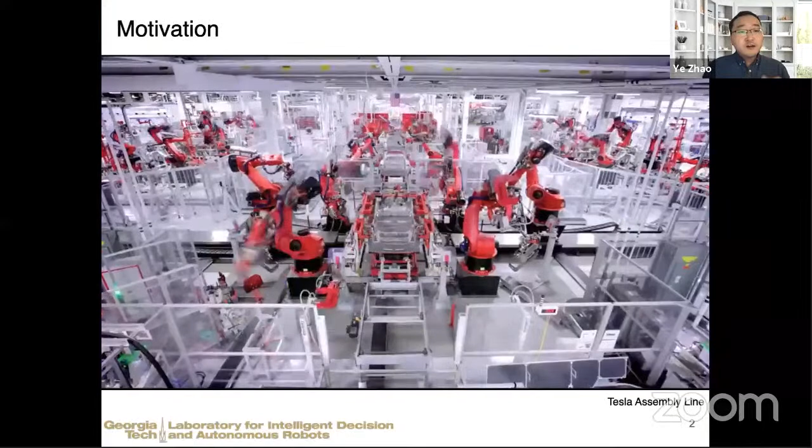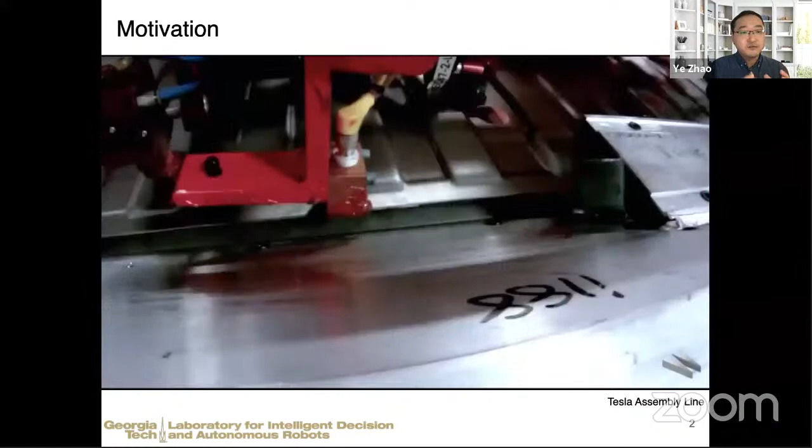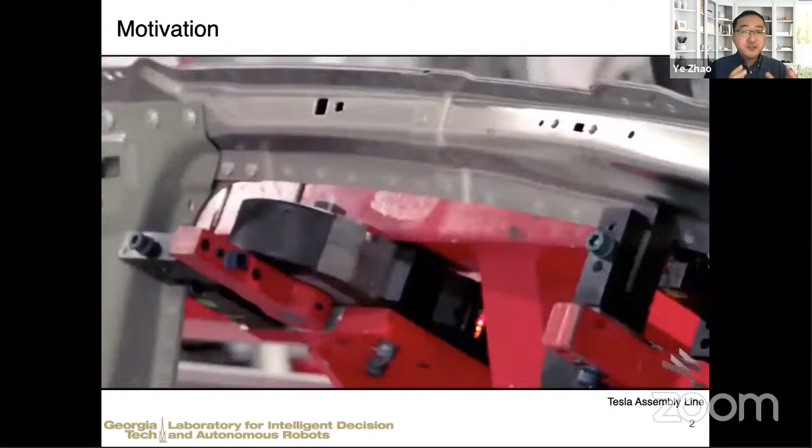Nowadays, many world-renowned automobile companies have adopted highly automated production lines for their vehicle manufacturing process. This is one example from the Tesla assembly line for their Model S vehicle. With current automation technologies, these industrial robots are almost as efficient as they can be nowadays. Almost every single component, either giant ones or tiny pieces, can be assembled within a few seconds. This has greatly relieved human workload by performing tedious tasks that could not be automated previously.

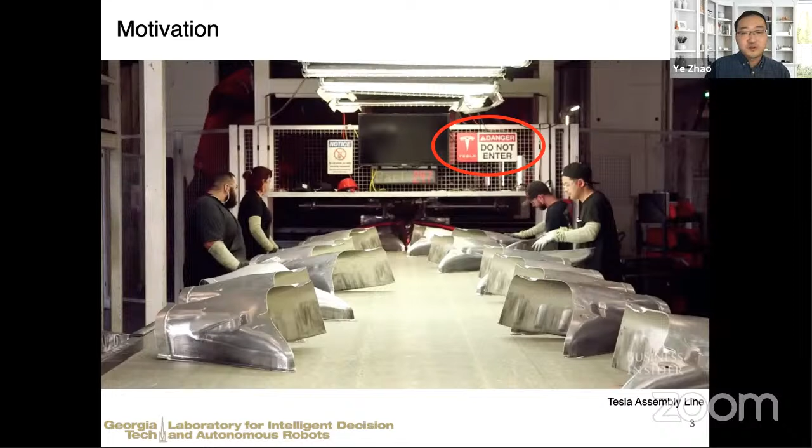Not only industrial robots, but also humanoid robots achieving more types of complex tasks. Many people in this seminar have probably already seen these robots from Boston Dynamics and Agility Robotics. These robots can demonstrate great agile and dynamic behaviors in outdoor and indoor environments. However, there are still many fundamental challenges from theoretical, computational, or experimental levels.

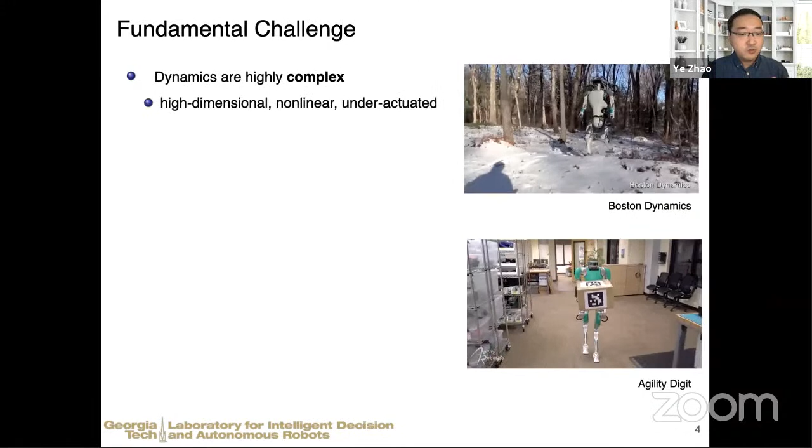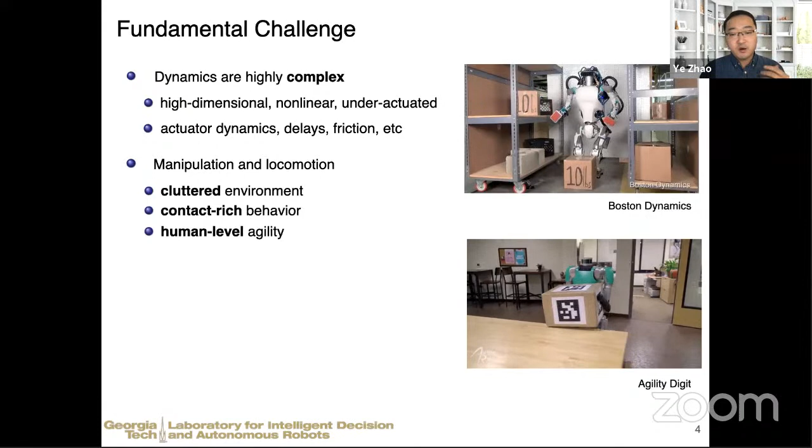First of all, the dynamics are highly complex - commonly high dimensional, nonlinear, and underactuated. Practical issues always exist in real systems, such as actuator dynamics, delays, friction, and so on. Many times the manipulation and locomotion problems are still far away from achieving performance like operating in cluttered environments, targeting contact-rich behaviors and human-level agility.

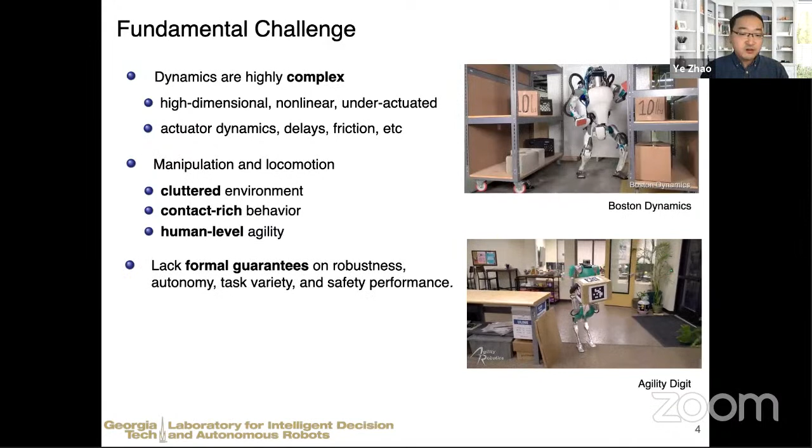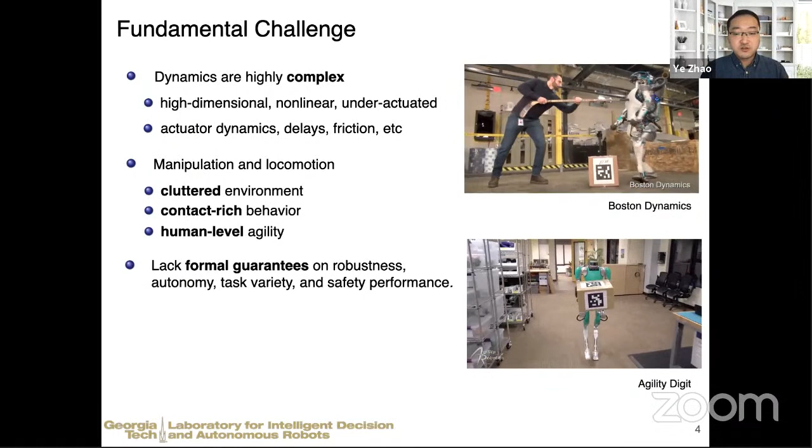Many planning and decision-making algorithms nowadays still lack formal guarantees such as robustness, safety, autonomy, and task variety, especially when the robot operates in outdoor rough terrain or partially observable environments. So it's very important for us to propose new computational tools and methods such that the robot can respond to unforeseen events and adapt to new environments at runtime.

From a high-level perspective, a fundamental question we are interested in is: what planning and decision-making algorithms do robots need to achieve agile, safe, robust, and collaborative behaviors, especially through contact? In this talk, I'm going to talk about some recent task and planning frameworks for highly dynamic locomotion, and in particular, present three unique angles to quantify robustness and reason about uncertainties.

I'm going to start with whole-body dynamic motion planning for robots maneuvering in constrained environments, and propose a certain robust metric to enable resilient contact locomotion decisions. Following on this direction, I will also talk about a task planning framework with belief tracking, especially for safe locomotion in partially observable environments.

And at the very end, I will discuss some contact-aware trajectory optimization method that can parameterize terrain uncertainties for robust cost function design and enhance risk-sensitive locomotion performance.

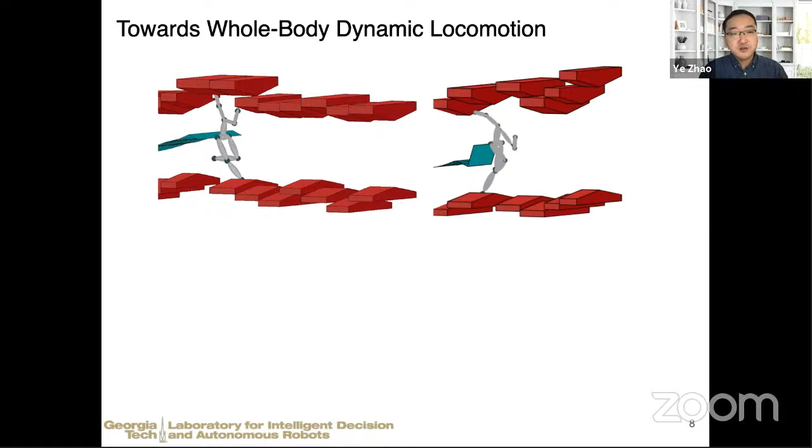So deviating from traditional bipedal-like locomotion, in this study we are targeting more generalized multi-contact behaviors using all-limb contact. The robot is expected to react to diverse environmental events by making sequential contact decisions. We expect the task planner can satisfy all the required task specifications in this so-called provably correct manner.

I also want to point out the locomotion scenarios in these constraint environments do have real-world applications. For example, the Thailand cave rescue a few years ago and the more recent DARPA subterranean challenge, although the current solutions mainly focus on grounded or aerial mobile robots.

To achieve these goals, a key question we should ask is how to intelligently compose and decompose these complex motions. This motivates us to investigate template-based locomotion methods, and in this case we refer to real human motions, especially those observed in parkour or gymnastic scenarios. So we extract the essential dynamics and model the abstract behaviors.

In particular, in the field of dynamic locomotion, many people use simplified models for planning and control, for example the inverted pendulum model, hopping model, multi-contact model, and so on. So here our goal is to unify these template models using a sequential composition approach for planning. It is essential to understand how to intelligently switch among different locomotion modes in response to diverse environmental events.

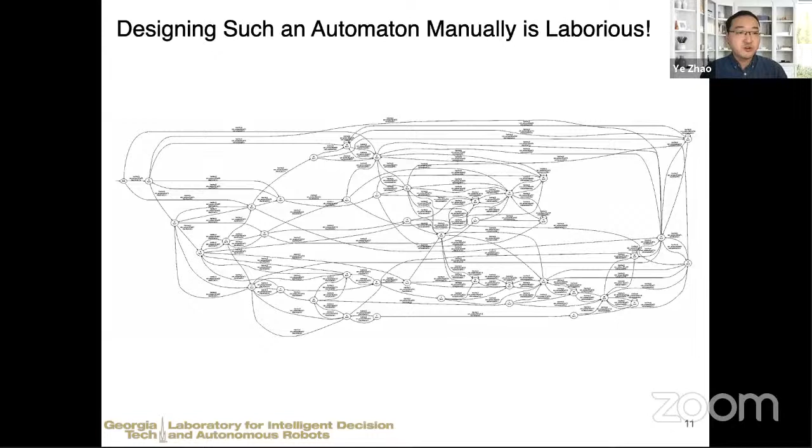So the way we frame this problem is to use temporal-logic-based formal methods for the task specifications and the planner synthesis. Temporal-logic methods have been widely used in hardware and software verification. In robotics, it's mainly used for mobile robot motion planning, but it's still relatively underexplored in the dynamic legged locomotion community, and our lab has been pushing for this direction over the past 2 years.

In particular, we follow a fragment of linear temporal logic formula named generalized reactivity one formula, which has the benefit of polynomial complexity.

By specifying the initial, transitional, and goal propositions, we can formulate the desired proposition phi in this so-called assume and guarantee form. Phi q encodes the properties of the locomotion keyframe state, phi e is the environment's assumption encoding knowledge about allowable environmental behaviors, and phi s describes the correct behaviors of the overall system. So this formula tells us if phi q and phi e are satisfied, then the system is guaranteed to behave in a correct manner.

Our objective is to synthesize a contact planner switching protocol such that, given a finite transition system TS and LTL specifications, we can synthesize a switching strategy gamma that only generates correct executions, so the robot can successfully maneuver in this constrained environment.

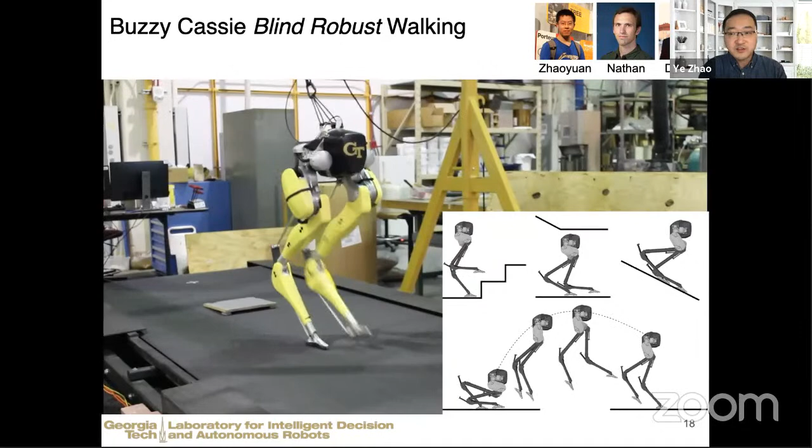The walking controller can successfully handle some terrain perturbations from wood blocks, but it purely relies on the robustness of this default low-level controller. Recently we've been actively moving toward temporal-logic-based sequential composition so the robot can respond to diverse environmental events, as shown before, like going upstairs, ramped terrain, or even when the terrain gets crashed.

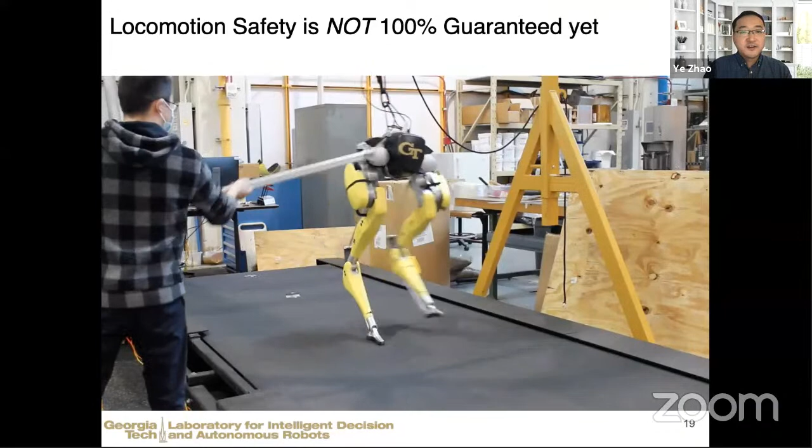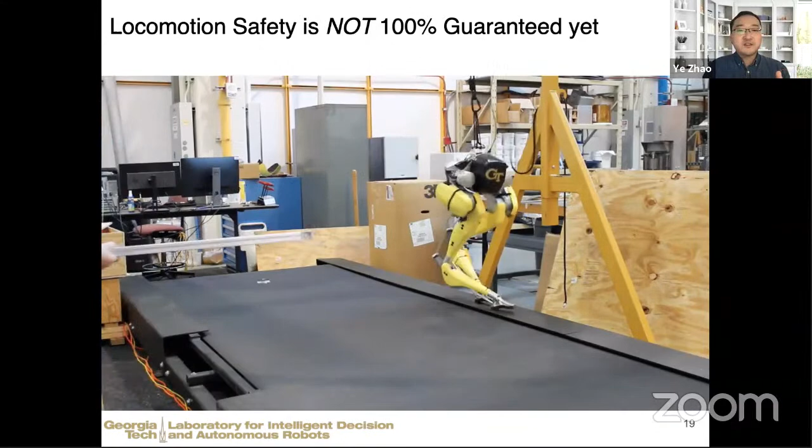I'd like to come back to this robustness problem for a second, and highlight one observation from our experiments. When my student Zhaoyuan poked Cassie from the side at a specific time, Cassie couldn't recover within one or two steps and just stepped off the treadmill. The camera didn't capture Zhaoyuan's face, but you can imagine how scared he felt about this push.

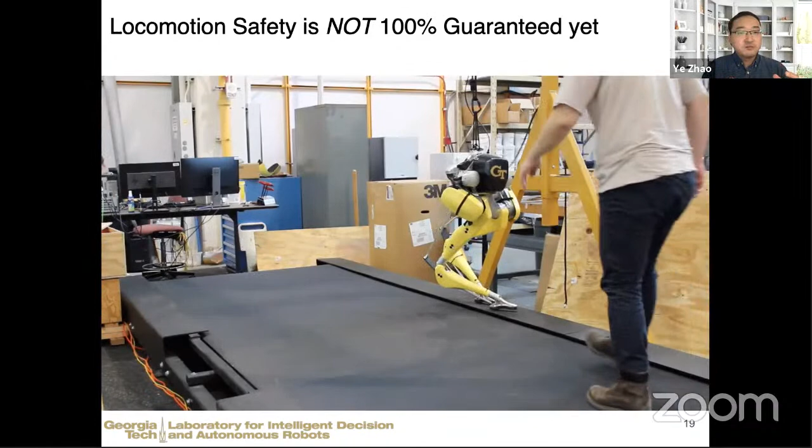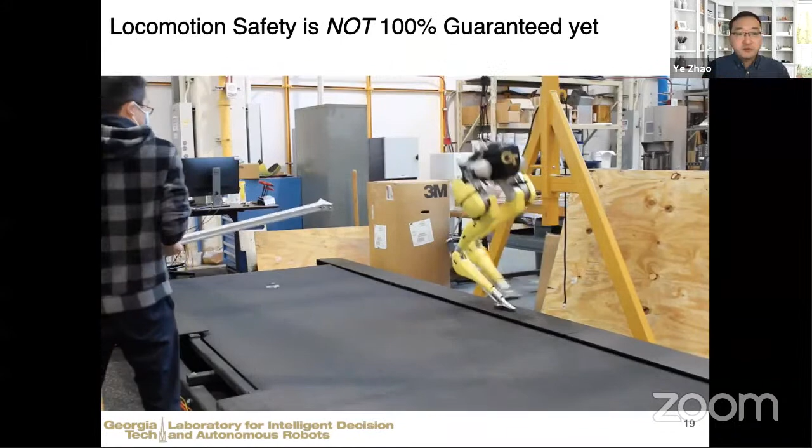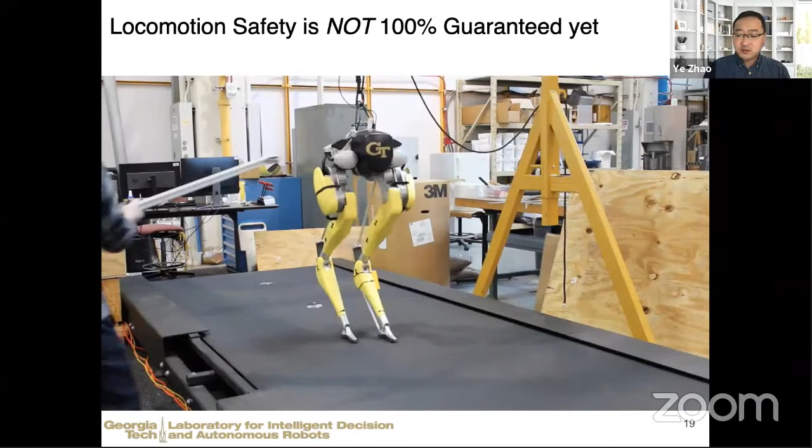This failure case certainly depends on the disturbance magnitude, at what walking phase it's applied, and where it's applied on the robot — there are many variations. But one thing we are sure of is that locomotion planning without robustness reasoning is going to be failure-prone and very fragile. This motivated us to design a robust margin using analytical solutions of locomotion manifolds derived from this reduced-order inverted pendulum model.

We show two consecutive walking steps, and each walking step has this valley-type manifold. We then derive tangent and cotangent manifolds to design this Riemannian space discretization, which is more advantageous than the traditional naive grid-world discretization. In this case, the abstraction is guaranteed to be consistent with the locomotion dynamics.

We design a set of robust margins around these nominal keyframe states and use the Riemannian manifold to quantify the robust margin radius. Given this robust margin, we compute robust keyframe transitions through reachability analysis.

The procedure is as follows. First, we identify a nominal keyframe transition designed by the high-level LTL-based symbolic planner for two consecutive walking steps. Then we expand this nominal transition cell by an epsilon-expanded radius, and take its neighborhood cells as alternative initial and goal keyframes.

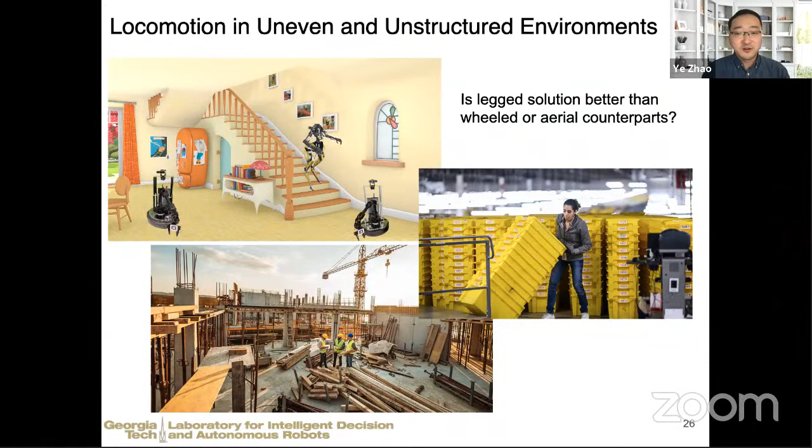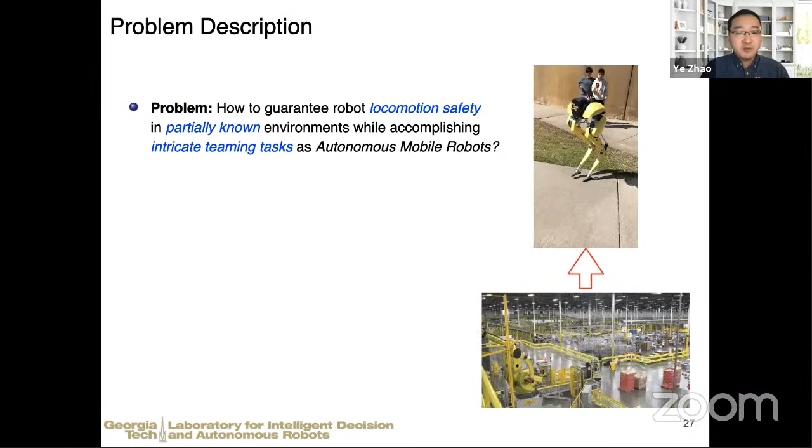So even thinking about any navigation problem, the first thing for a legged system to consider is how to balance safely and where to put the next foot location. So a central problem we are interested in is how to design planning strategies such that these legged robots can locomote safely in these partially known environments, and at the same time accomplish these intricate teaming tasks like autonomous mobile robots. And there are multiple key considerations.

First, this locomotion problem needs to consider not only balancing safety, but also navigation safety. For example, the robots should be able to avoid collisions with other obstacles or humans, and at the same time it should plan the foot locations correctly, or even grasp objects firmly.

Another key component is the environment. Many times we have rough terrain, partially observable environments. The robots might only have a local field of view. In this situation, how are we going to parameterize and abstract the environments? Do we choose a fine or maybe coarse level abstraction? All of these are going to give us different computational workloads and different planning capabilities.

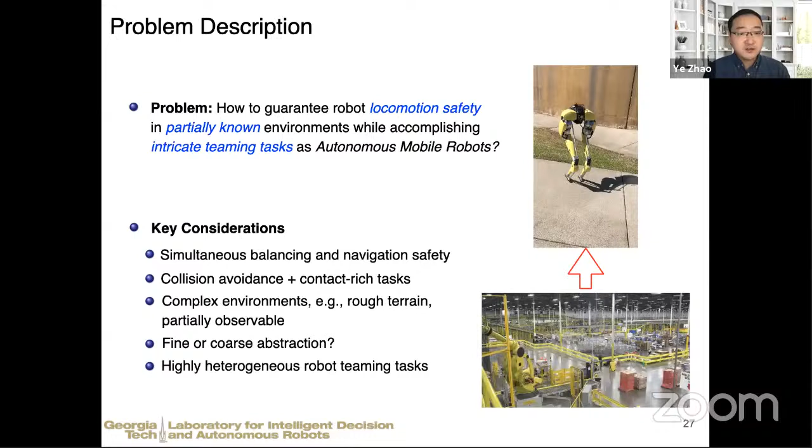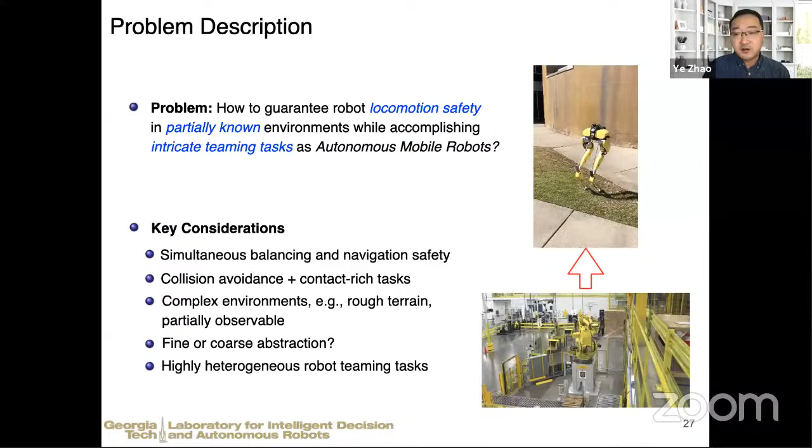And the last but not the least is the robot task, right? We want the robot to collaborate with other robots for some cooperative task, like delivering a package or maybe manipulating a box together with other robotic systems.

To address this problem, we propose a hierarchical planning framework composed of task and motion planning layers. The high-level task planner is composed of two sub-planners to handle task specifications at different abstraction levels, which I'm going to talk about in a minute.

Essentially, this high-level task planner is going to generate a discrete locomotion action command to govern the global navigation task. And then the low-level motion planner is going to receive commands from the high level and design these local safe walking motions in 3D space, with the capability of maneuvering rough terrain and steering the heading angles.

On the other hand, at the high level, we aim for navigation safety such as collision avoidance and other goal specifications, such as visiting location A infinitely often, or maybe other connectivity constraints for this collaborative robot task. And to really make this locomotion problem meet both locomotion safety and navigation specifications, another question to ask is what type of environmental abstraction we should use.

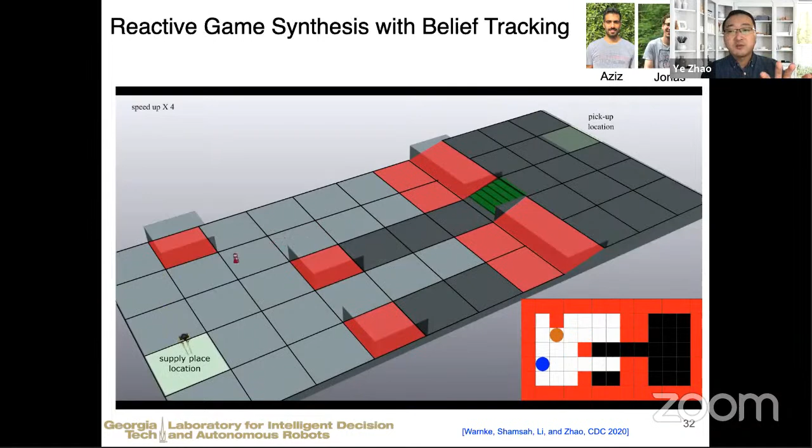To evaluate this belief tracking performance, we construct open world environments. The walking robot is required to visit the pickup location at the upper level and move to the destination at the lower level, while avoiding collisions with obstacles, which are mobile robots in this case. The belief abstraction of the environment is updated online based on its local view of the field. The light gray cell represents the belief region of possible obstacle locations, and the dark gray cell represents non-visible regions that are obstacle-free.

We are also targeting a generalization to handle multiple dynamic obstacles, for example two mobile robot obstacles, or maybe three, or more than that. So how can we build a joint belief abstraction of the obstacles without significant computational load increase? This is another ongoing work.

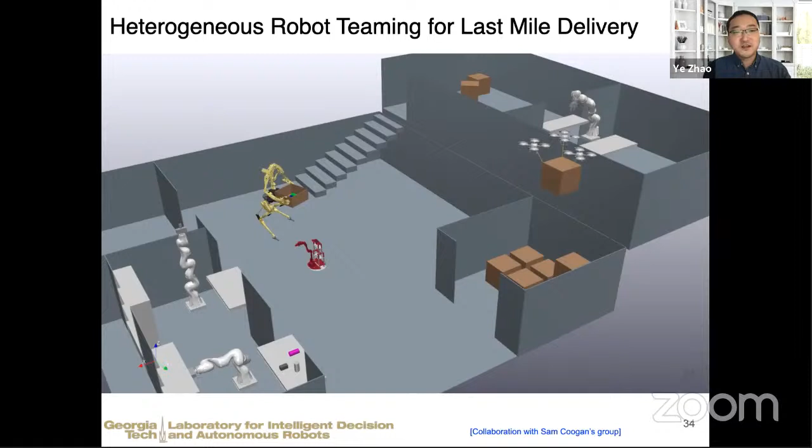This semester we are moving towards more complex scenarios, targeting a scalable, safe, hierarchical mission and task planning framework. We are especially interested in this last mile delivery problem, exploring collaborative robot tasks involving legged aerial and manipulation robots. One scenario we are studying now is how Cassie can team up with a fleet of quadrotors, forming a leader and follower subteam for package delivery.

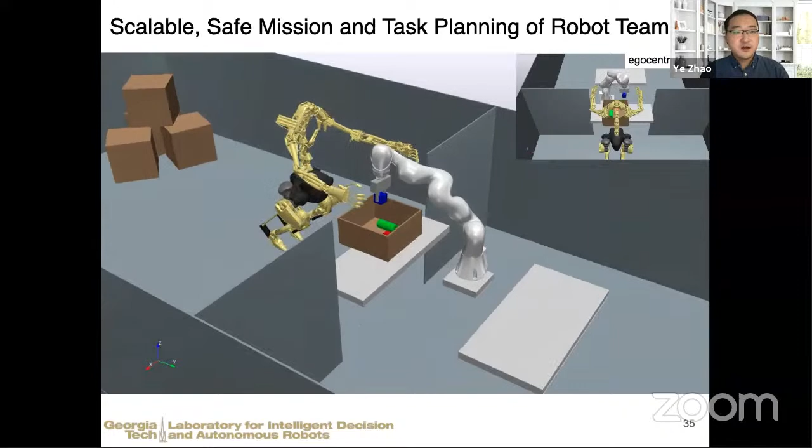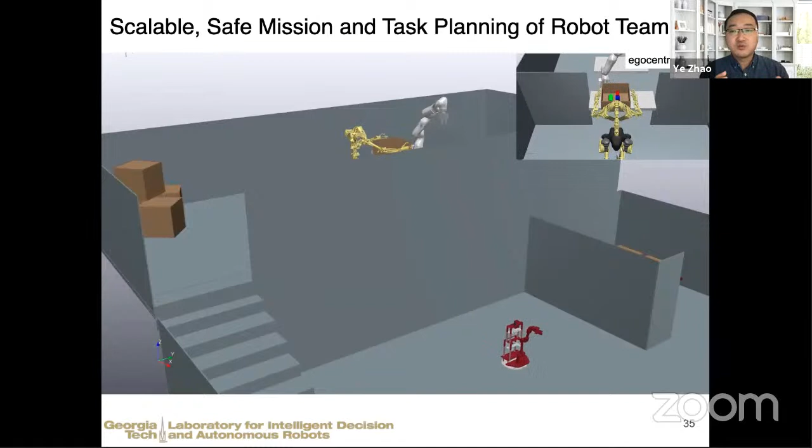More specifically, we are looking at long horizon robot tasks, such as a KUKA arm storing the object into the box. After that, the Cassie robot picks it up and delivers it to a destination location downstairs. The key research questions we address include how to make contact decisions with the manipulated object and how to avoid collisions with dynamic obstacles in these environments.

From the high level mission planning perspective, we are also looking at problems like how to design decomposition algorithms such that the multi-agent system can be decomposed into multiple robot systems while guaranteeing the global task specifications.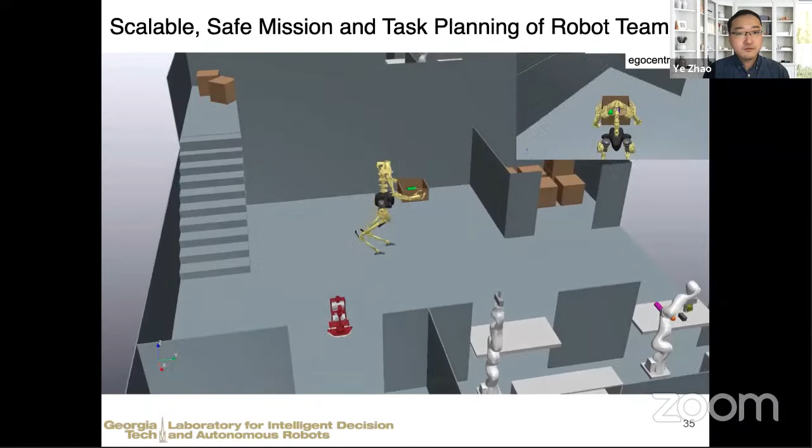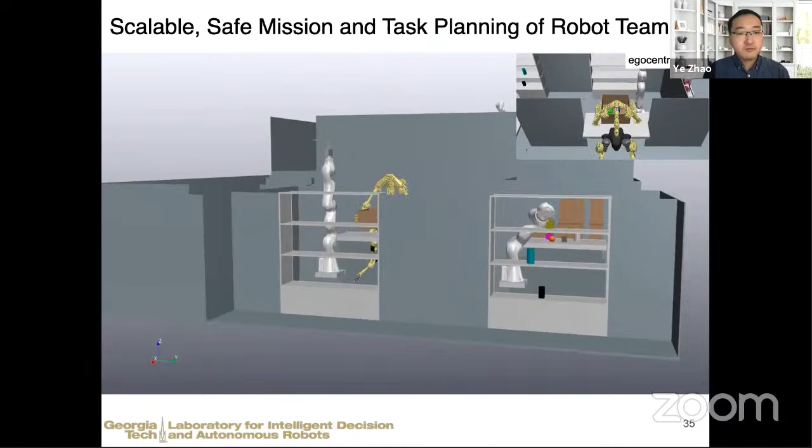Also motivated by this collaborative robot task, we are exploring multi-contact locomotion and manipulation task planning, specifically how to design optimal task allocation strategies for this object-centric contact planning.

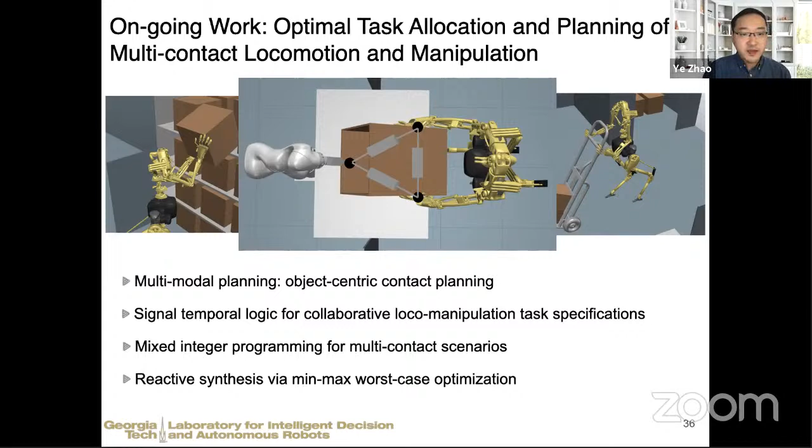We are investigating signal temporal logic to specify loco-manipulation task specifications, and how to transform these signal temporal logic specifications into a mixed integer program for multi-contact planning, which is modeled as a virtual linkage model inspired by the grasping community. For the sake of time, I'd be happy to talk about more details offline if you're interested.

I will briefly talk about the last direction, especially robust trajectory optimization and how to handle contact problems. For the previous problems, the contact part is treated as discrete decisions, and we ignore a lot of frictional contact dynamics details. But in reality, these contact problems could be very complex and often make planning and control algorithms difficult to solve. I'd like to use this one slide to motivate a little bit about why the contact problem is challenging.

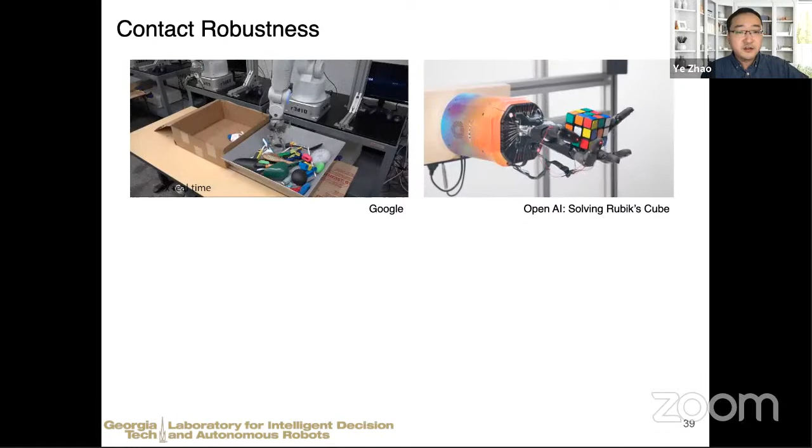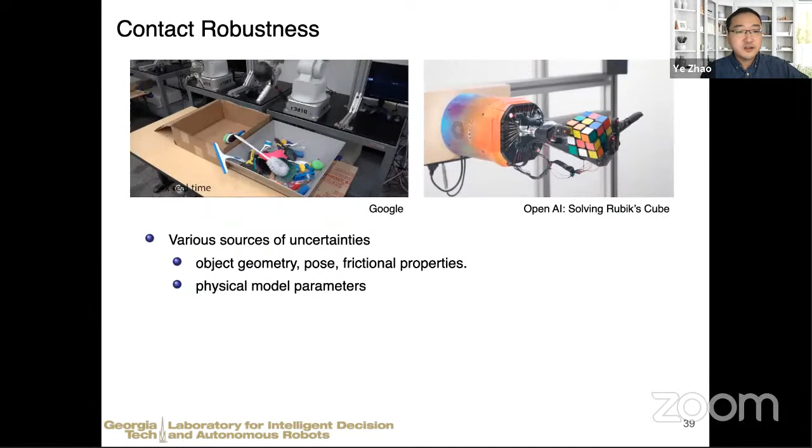From our perspective, a key factor that makes traditional trajectory planning and control brittle is uncertainty. In these manipulation examples, there are various sources of uncertainty like the object geometry, pose, and friction properties. At the same time, this contact switch mismatch can lead to a catastrophe.

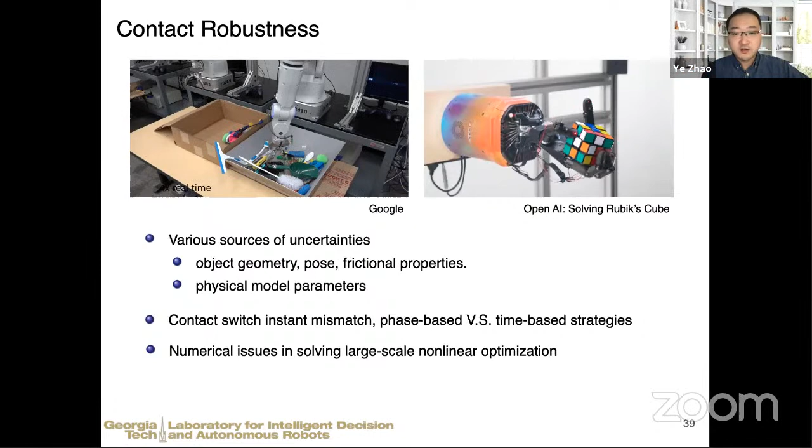There is a lot of related work in this hybrid planning community, like reasoning about phase-based and time-based strategies. For trajectory optimization, especially solving large-scale nonlinear optimization, it involves a lot of numerical problems, and all of these affect the contact performance.

So I think I would like to skip a few slides.

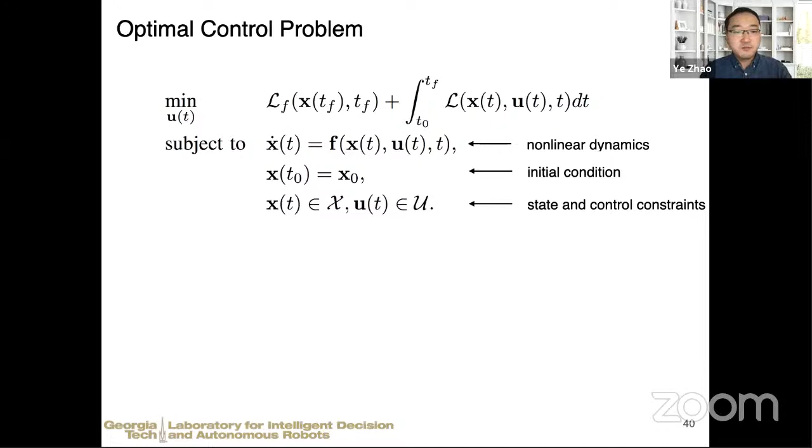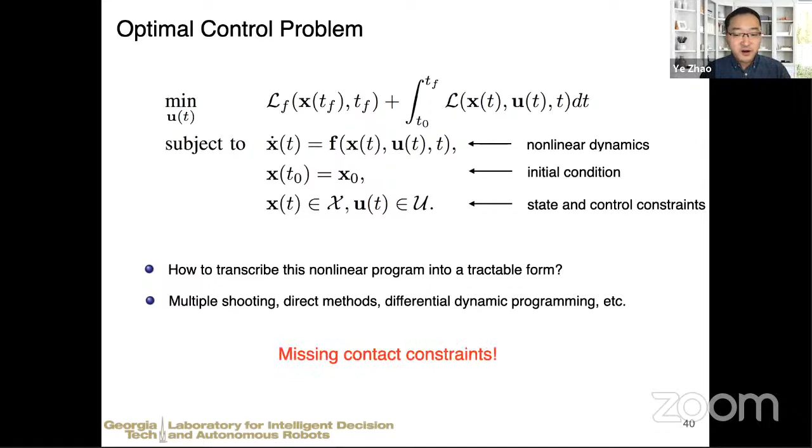Basically, this is talking about the general optimal control problems, and there are many ways to solve these, either like multiple shooting, direct method, or DDP. But the missing part is actually the contact constraints. So what we do is add these contact constraints into this optimization problem, and add a series of contact force decisions as the decision variables, and solve this so-called contact implicit trajectory optimization.

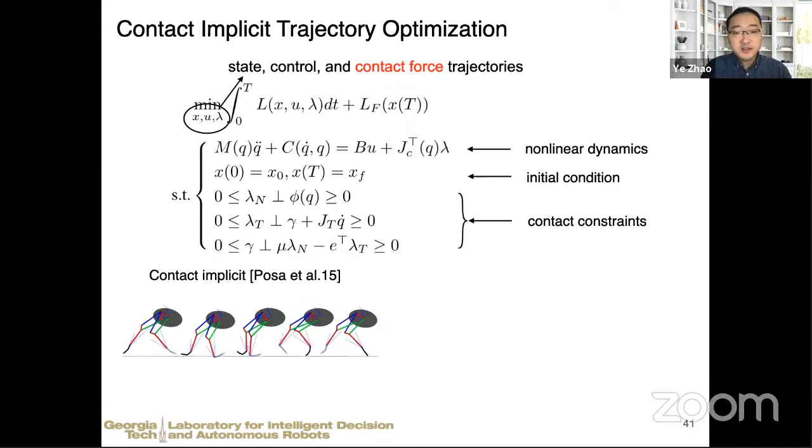Along this work, there are several seminal works in this area, like Posa's contact implicit trajectory optimization and the Mordatch approach on contact invariant optimization. The core idea is to solve this large scale optimization that can automatically figure out the contact forces.

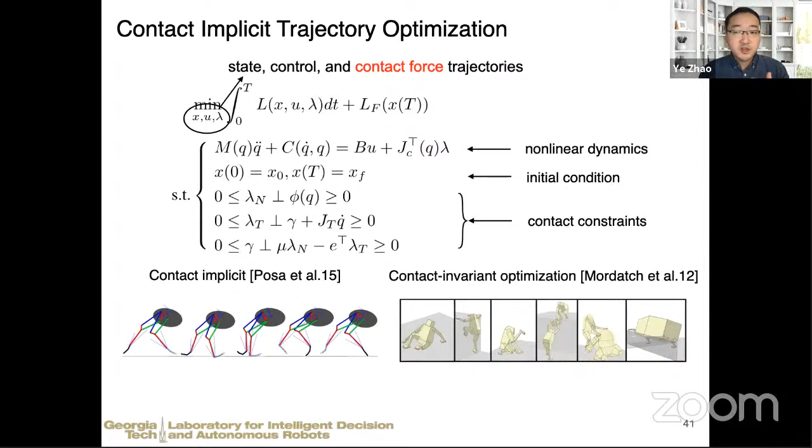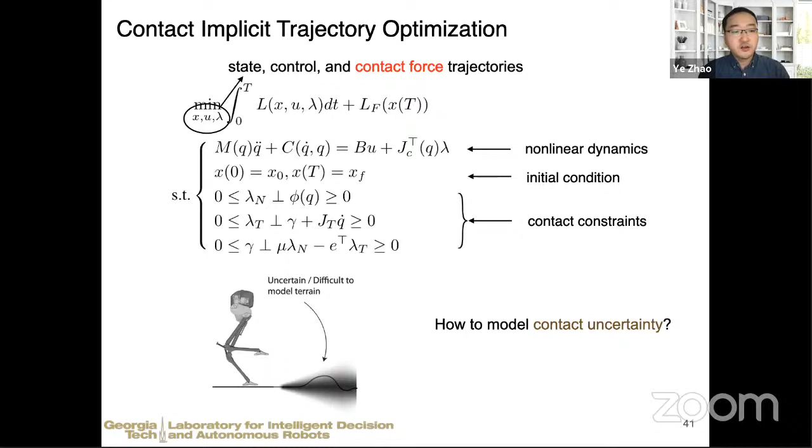But there's one problem for this type of research. During implementation, people realize the optimization can become brittle due to contact uncertainties, like those from terrain geometries or friction coefficient. So in this work, we are interested in reasoning about contact uncertainties. The question is how we can model these uncertainties when we don't have full knowledge about the friction coefficient or geometry, and how we can design robust motion plans.

So the way we frame this problem is to parameterize the friction coefficient and terrain height uncertainty through a Gaussian distribution. We replace the deterministic contact constraints by an expected residual minimization term, called the ERM cost. It minimizes the expected residual of the LCP product. By inducing this ERM cost into the objective function, we can enforce the contact constraints in a probabilistic sense while taking into account the parameterized contact uncertainties.

By some mathematical manipulations, we can also realize that this ERM cost is equivalent to the mean residual plus a variance term, which can be interpreted as a risk-sensitive formulation. By selecting specific signs of this variance term, we can derive risk-seeking or risk-averse strategies as needed.

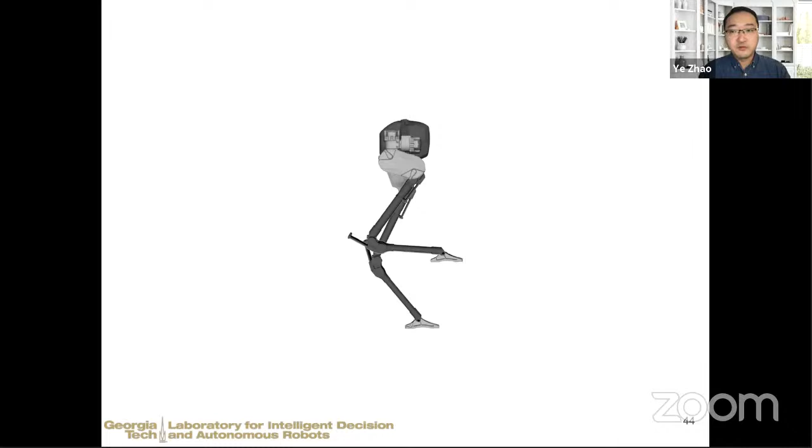So maybe the last part I'd like to briefly mention is trajectory optimization for distributed full body dynamics consensus. For example, if we take the Cassie robot, there are lots of constraints, like whole body dynamics constraints, centroidal dynamics constraints, contact constraints, etc. Many existing algorithms usually solve this optimization with all constraints simultaneously, which makes the algorithm often suffer from convergence problems and numerical issues. So our motivation is really to decompose these constraints into multiple blocks and solve them in a distributed fashion.

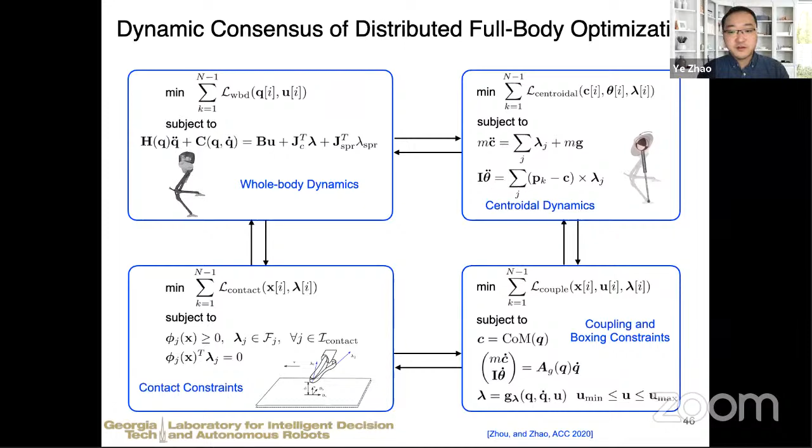Along this direction, we solve this full body optimization by employing a distributed optimization approach named ADMM. We use this consensus method to achieve the full body optimization. The core idea is really to decompose this large scale, highly nonlinear program into multiple subproblems and iteratively solve this augmented Lagrangian optimization.

So I will skip some details here. I'm going to skip this as well.

We also have work on this PDDL-based AI planning for long horizon manipulation.

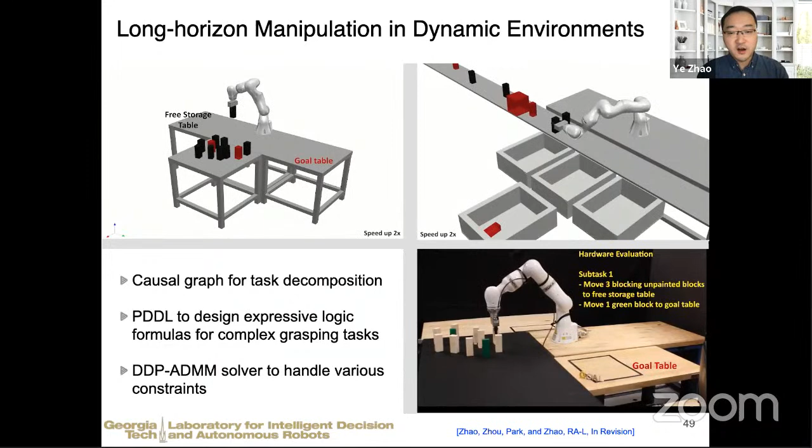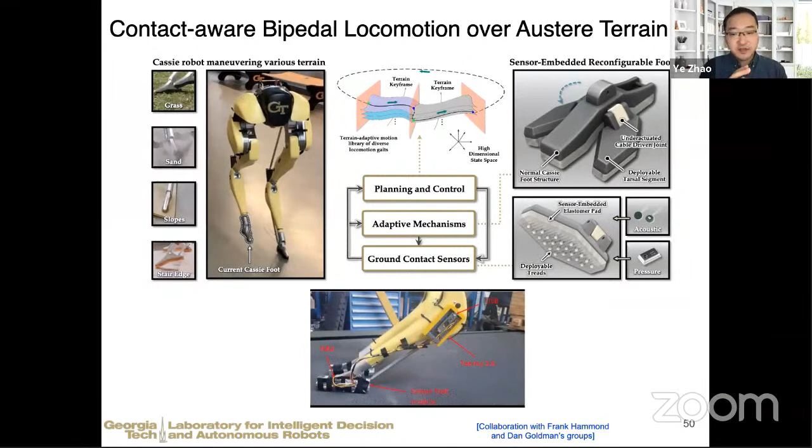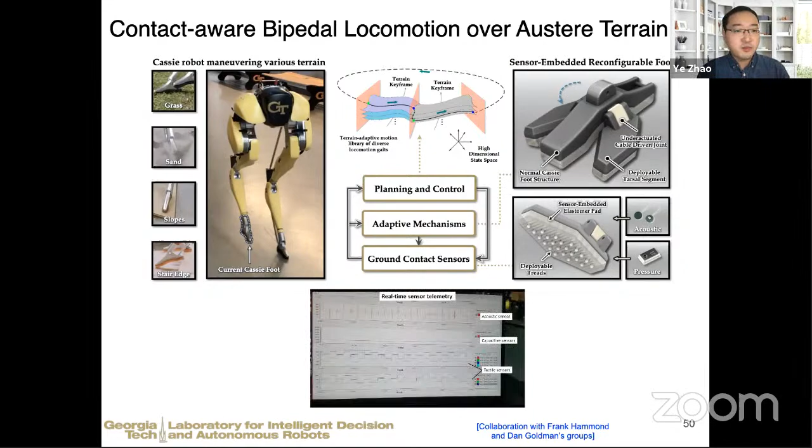We are also interested in designing a new Cassie foot sensor pad for terrain classification and contact sensing, so we can design better control and motion planning strategies when these robots go to very complex terrains. And this is a new project.

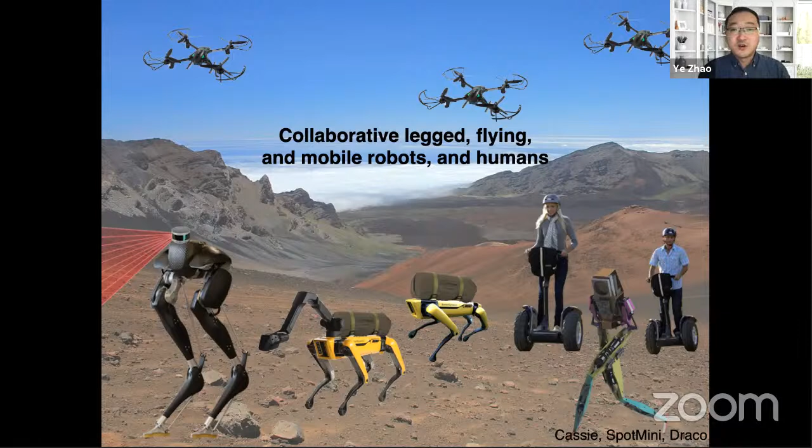We'll skip this. So my very last thoughts before I close this seminar: I think over the next 5 to 10 years, we're going to see a lot of legged systems showing up in our daily life, maybe teaming up with other kinds of robots and accompanying humans in outdoor environments or disaster response.

Hopefully we can see this happening sooner rather than later. So with that, I'm going to stop and I'll be happy to take questions if we still have a few minutes.

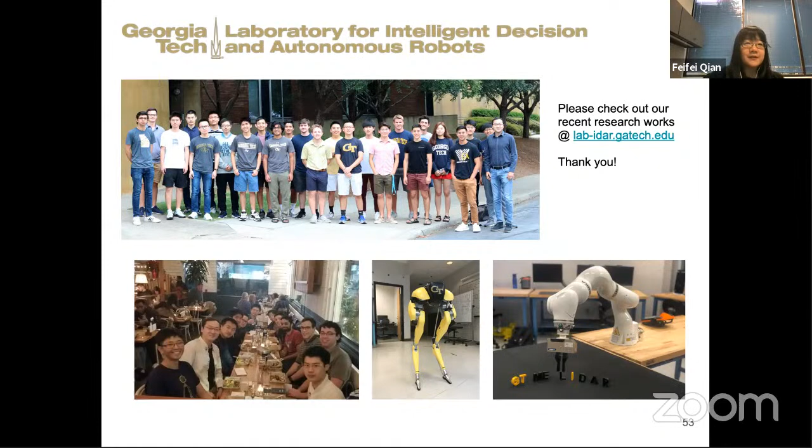Thanks for the very exciting talk, a lot of very cool work here. We do have a question in the chat. So the Q&A, let's see: when a robot encounters obstacles and considers how to avoid them, will it consider which way is better to save energy?

Okay, let me switch back. Sorry, can you repeat the question? Yeah, it's asking about energy efficiency consideration, especially during robot obstacle avoidance. So when the robot encounters obstacles and considers how to avoid them, will it consider which way might be better in terms of saving energy?

I think that's a great question, especially in terms of avoiding collisions with obstacles. I think we can reason about it at two levels. One is the local level, the short horizon, when the walking robot is already stepping around the obstacle, so how it can take advantage of locomotion dynamics to dynamically maneuver this and generate maybe more energy-efficient locomotion gaits. This is the first stage.

Another stage is on the long-term run. If the robot maneuvers in an unknown or partially known environment, there may be obstacles a few meters away from the robot. In this case, the robot needs to be able to select a different walking path, so maybe from the high level, and in this case there could be energy efficiency considerations taken into account.